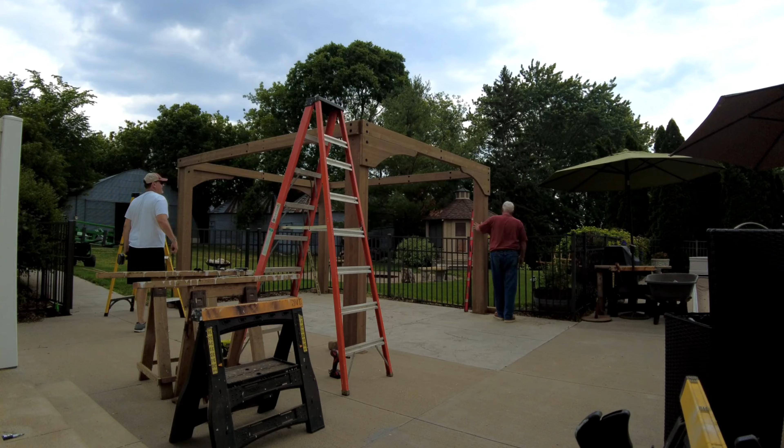Alright, this is Dad Random. On vacation, and when I go on vacation, I usually build something. So this is the Grandpa John bar shed, working on a little gazebo project for him. Building it now. This is a pre-build, so it should be kind of fun.

It's a little bit tough. We've had a little bit of a challenge putting it together. A lot of parts to this one. Used to making things from parts that I create, but this one is basically made of parts created by somebody else and directions written by somebody else. So it's been real good, it's been a real challenge, but it's pretty hefty. It's not bad. It's a Costco project. Got a lot of bolts, a lot of real heavy duty reinforcement, so it's going to be really nice.

This one's about, it's a 12 by 14, so... yeah, 10 by 14. I think it says 12 for the roof, but at the base, at the foot, it's 10. So, but yeah, it's pretty cool.

So yeah, day one, got a little bit of a time lapse. Couldn't do another time lapse because it was hot, and then I was trying to keep a pace, and things happen. So we got a little bit in there. But I wanted to get like the barn raising time lapse. But so far so good.

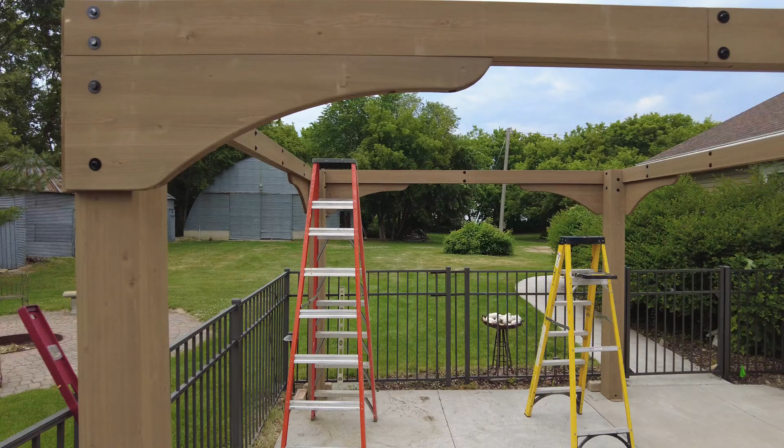All right, Dad Random. So there's a corner construction, base construction. You can see the bottom plate, this will be bolted. But yeah, and just remember, mine's bigger, at least 5 feet.

Okay, on vacation, working on bar shed number 2, Grandpa John's bar shed. I guess you call it a gazebo too, but we're gonna drink beer in it. Bye.

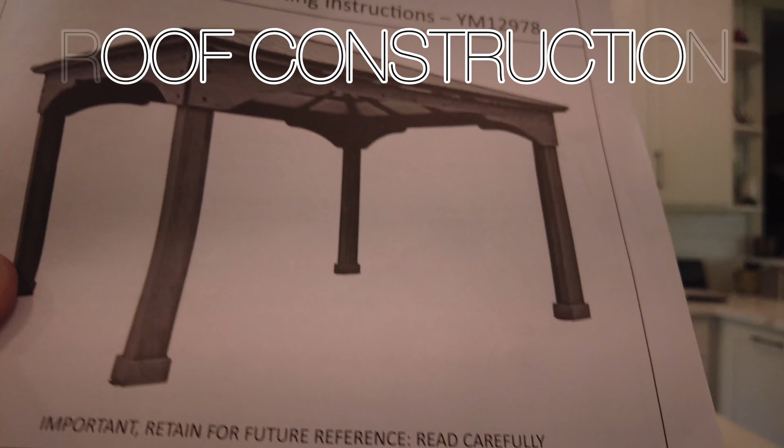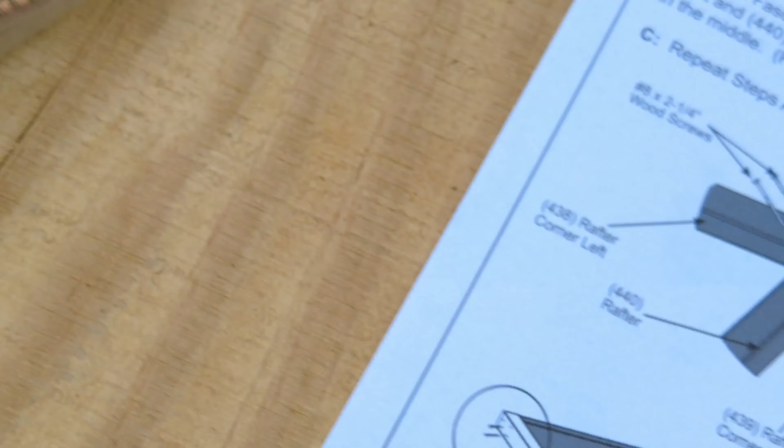Alright, today we're working on these roof panels right here, roof rafter assembly. A couple of notes: one is making sure you line up - these are compound miters. And making sure you keep your screws marked. So we've got our screws labeled out and laid out. And make sure you connect the 2 fascia parts so you get the correct length.

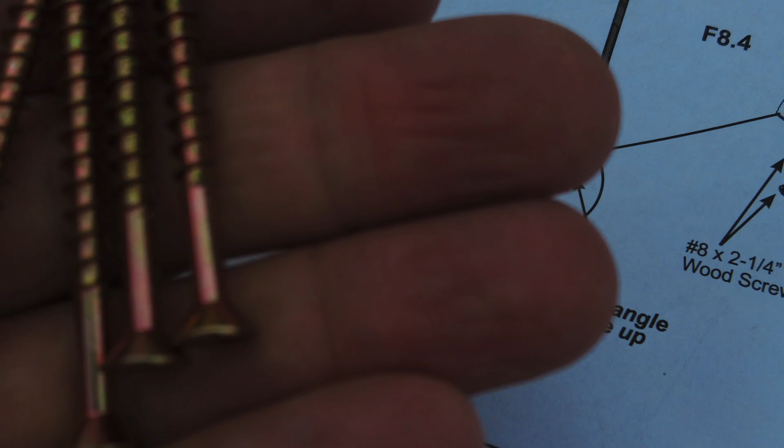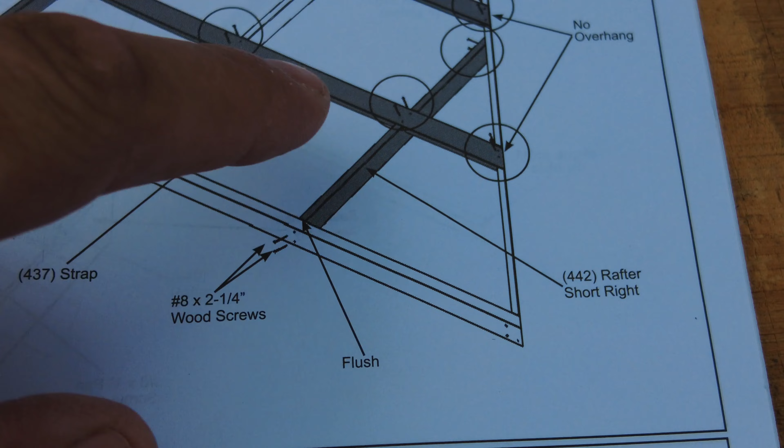But there are 2 sets of screws in this construction. The ones that connect the corners together, which are basically 2 1/4 inch wood screws, and then you have 1.5 inch screws right there. You'll see that connect the flat parts that the metal will connect to when you start putting the tin on, or the roofing material. So there it is right there.

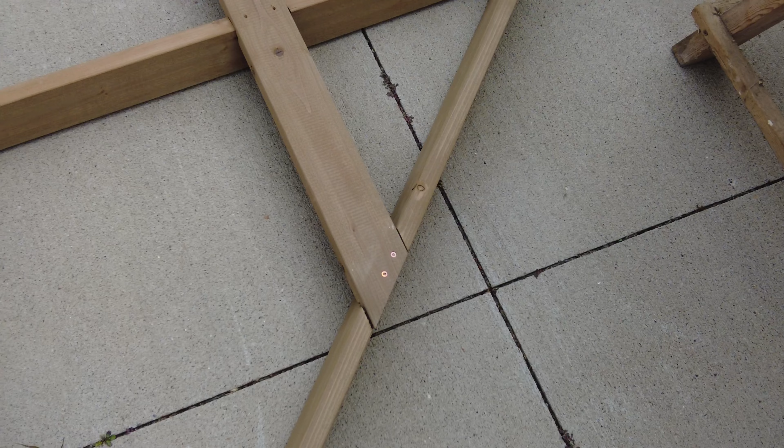And you've got the structural elements, and then you've got the flat parts. So, alright, good luck with that. We've got 4 of these to put together today - 4 on the corners, and then we'll look at the construction part, how everything kind of ties together.

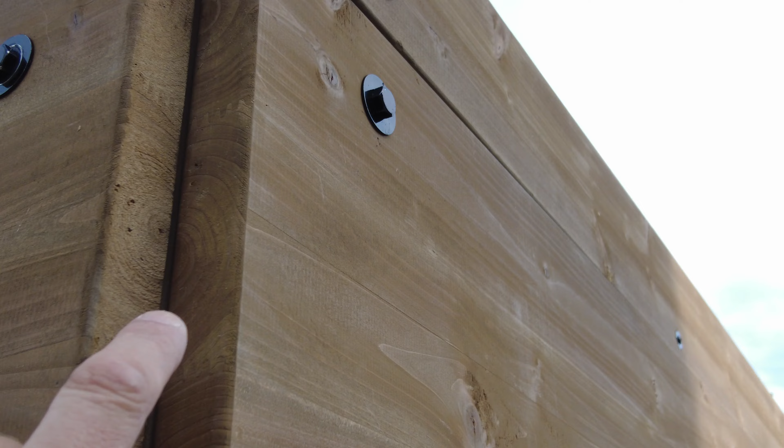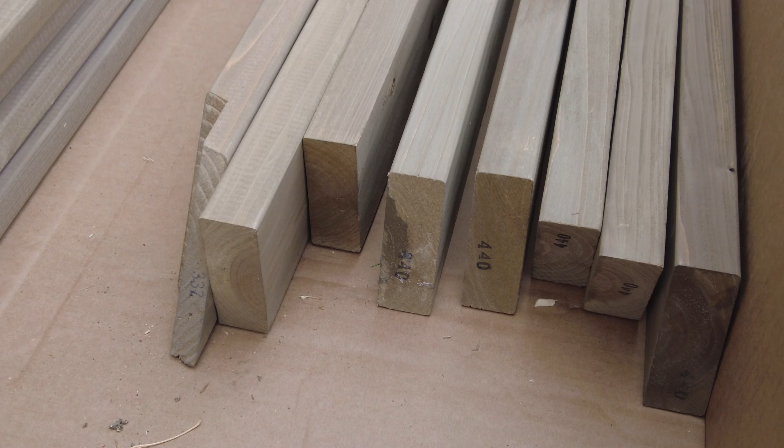Here's the way we've got our tools assorted and our boxes laid out. Some of the construction details - they're not perfect, but they should work fine. And the footprint. More box layout. Start to organize numbers, you can see each of them are numbered on the ends. Number them together so you don't have to look so far. You're going to be looking a lot.

These are vertical, these are also vertical pieces. The horizontal pieces tend to be thinner, skinnier. Good luck.

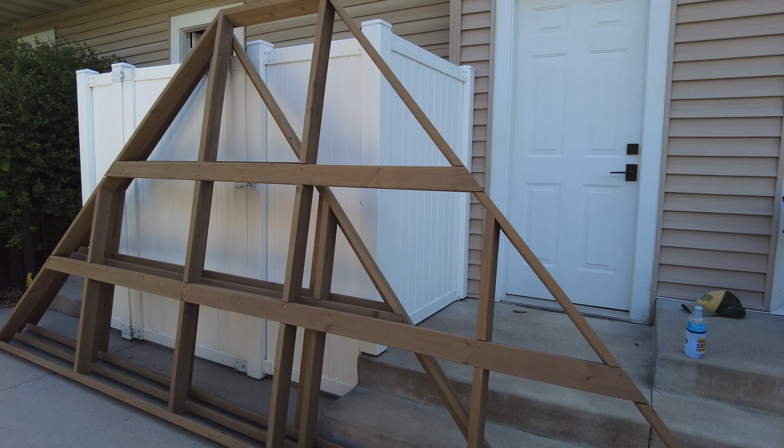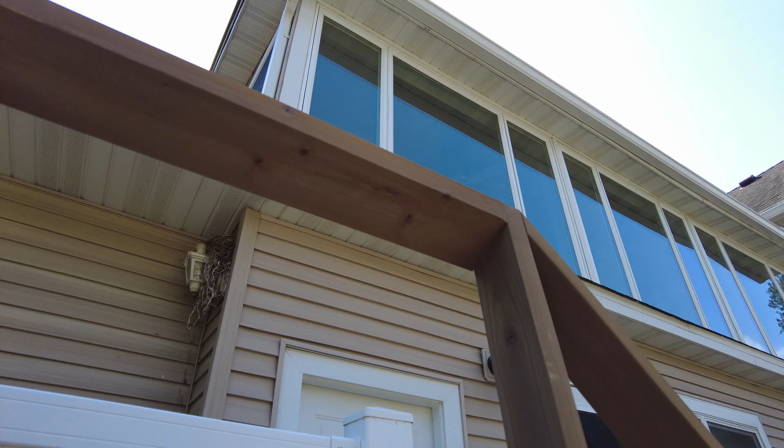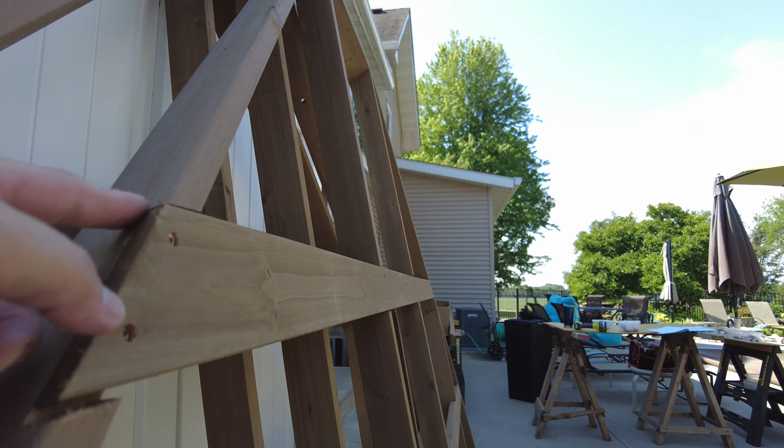You've got a square segment on the top, but it pretty much follows the rest of the rules. Just pay close attention to the numbers and the angles, okay, because you've got basically compound angles coming together. You've got basically 3 different planes, 1, 2, and 3. So right there, that is piece 1. I'm gonna repeat this piece.

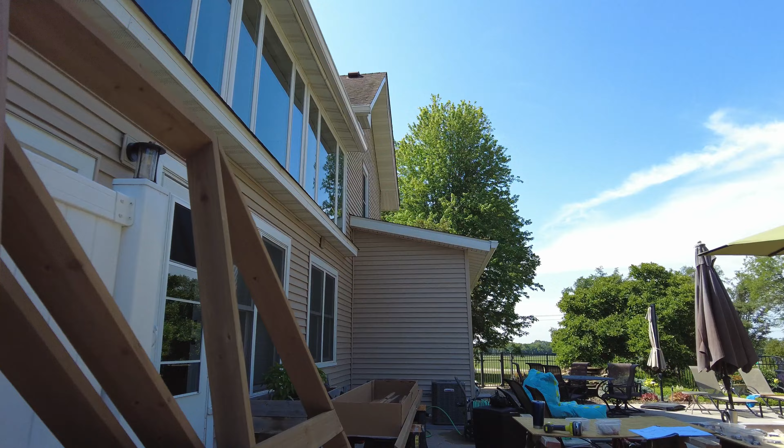There's actually 3 different types of screws in here. These are larger, 2.5 inches - almost all of the other ones going this way are 2.5. These are 2.25, and the rest are 1.25 inch - the ones that are pulling the segments together.

So far so good on the rafter build.

I should have this last one done. My hamstrings are good and stretched out.

It's really important that you find a big flat area. This area here that I'm basically working on - let me just flip it over - is probably 15 by 10. So about 15 by 10.

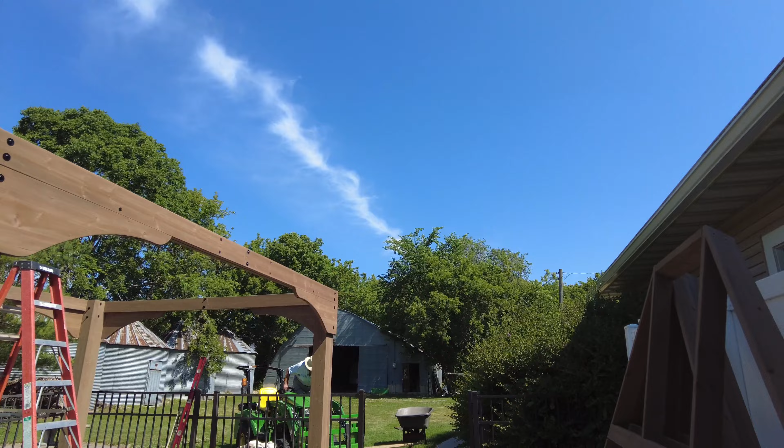And it helps to have a really level area. You need a real big flat area, otherwise everything is going to be tougher to piece together. But there it is - there's a step, probably a 3rd set. I'm going to finish the 4th set, and we'll start piecing together the roof pieces in sequence.

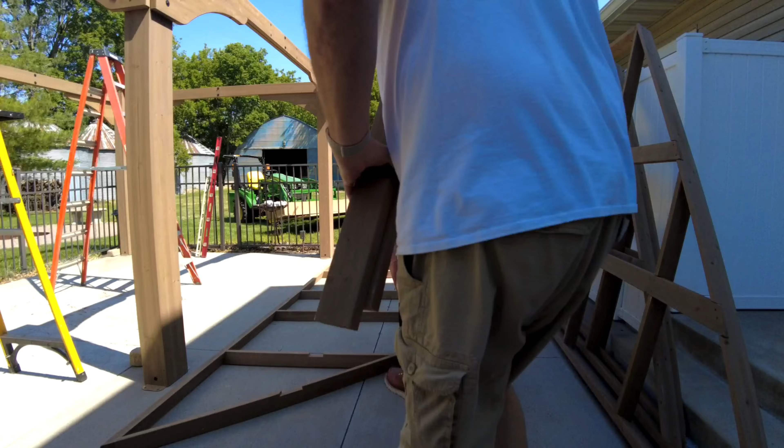All right, Dad Random back. Here are 2 of our completed roof panels.

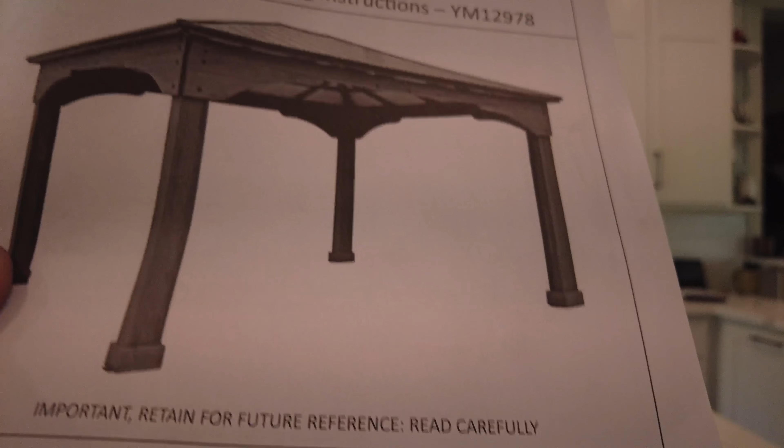So one of the things I suggest is, and pretty much all the material you're going to find, is assembling these - now these edges are kind of tricky, and you have to make sure that you put in the weather stripping.

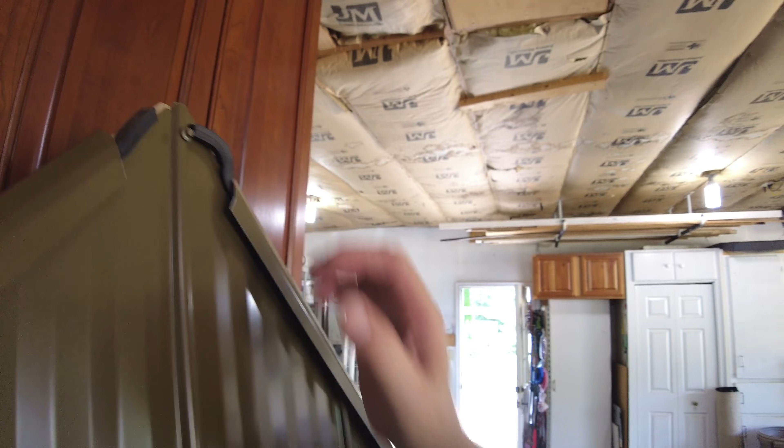Crossing our fingers that these are okay. You can see the unfinished large side panels and the different - there's a lot of pieces. There's a whole lot of flashing, and every single piece of metal has a coating of that plastic, so you have to separate it. You can see right there.

So far so good. We're crossing our fingers that all the panels will be completed, and we'll put them up tomorrow, probably tomorrow morning, assuming we don't have issues.

I think we've been at it today probably since about 8:30. So we've got quite a few hours in this project. There's two of us, and we're just kind of taking our time.

The directions are pretty good, but they're not clear. I suggest to anybody working on this project to check all the videos. There's a lot of good videos, including this one. There's a lot of little steps that you need to basically adhere to.

One is as you fit these steel panels on right here, you don't want to fit them all the way to the edge - you want to bring them back just a little bit. It's okay to overhang at the bottom, but the area where these two pieces meet, you want to leave a gap. That gap is good because it allows for the four sections to squeeze together.

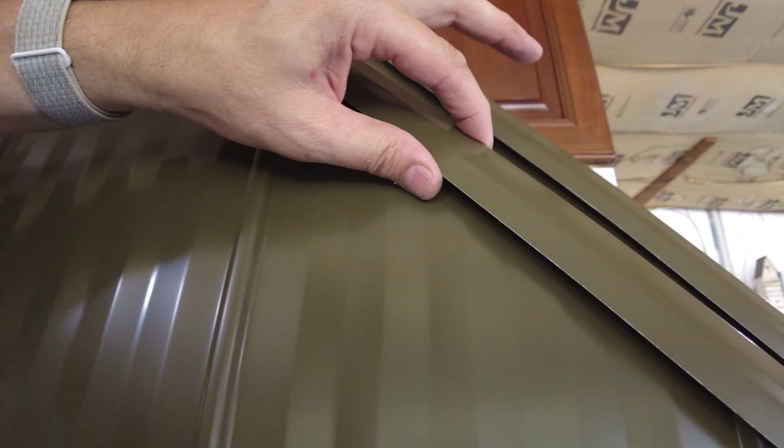And you see these edges right here - there's a piece that's gonna slide just to connect the two sections together. So these right here, you see how they're slid together - these will slide along both edges and create a ridge lock. So anyway, we'll get to that point and then show you how that locks together.

But so far so good. Weather's been cooperating, so that's one of the things you want - and of course any labor-saving device is always nice.

So all right, I think we got every tool out that's possible. But you can see this big space - we're basically in a 3-car garage, and we're utilizing the whole middle of 2 of the bays to set these big sections. And these sections over here are even bigger.

They are 14 feet long by 10 feet wide, something like that. All right, Dad Random.

Take your time. Look at the fine details, especially where the trim comes together. Measure twice, cut once, as a very famous builder would say - but I would say read twice, and then put it together once.

We've only had to assemble these two parts twice - we've had to pull the screws out, readjust the metal sheets, and then screw them back in. Both of them we had to do. So it's just, but I think we're good - I think the way we've got them now.

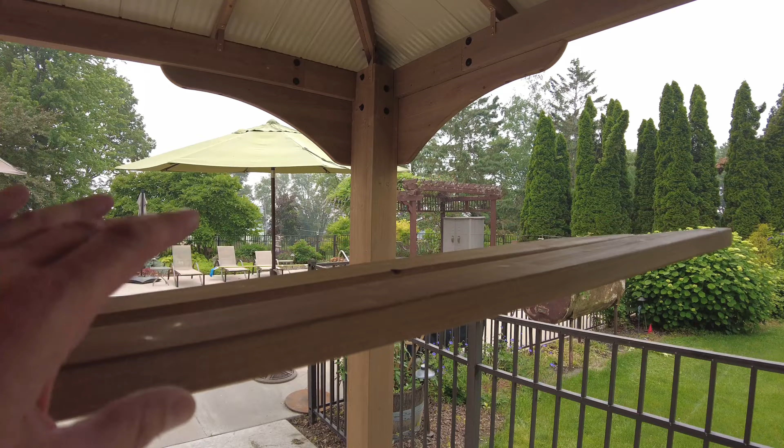There's only two more boards left. These are basically span ties, they just span the roof, some strengtheners to give it some extra support. We'll put those up. We haven't tied down the main post to the ground yet, to the concrete. Not yet. We're here, but the roof has got plenty of span ties.

And then if you look up this way, see if I can go find it. So we got the roof trimmed out. So let me see if we can get it... it's not behaving here. Let's do this. All right, so there are the roof angles right there. Corner finish.

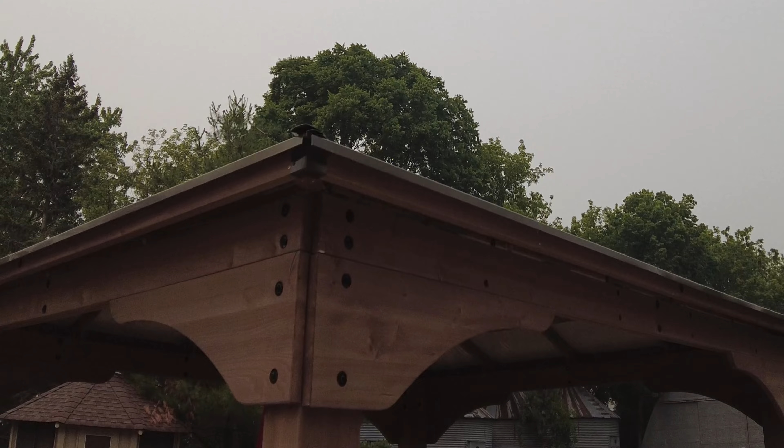You got a couple little call those personality traits. Everybody puts their own personality in a project. Not too happy with how those trim out, but it's still pretty good. That's just the way they are, that's just the way they trim out.

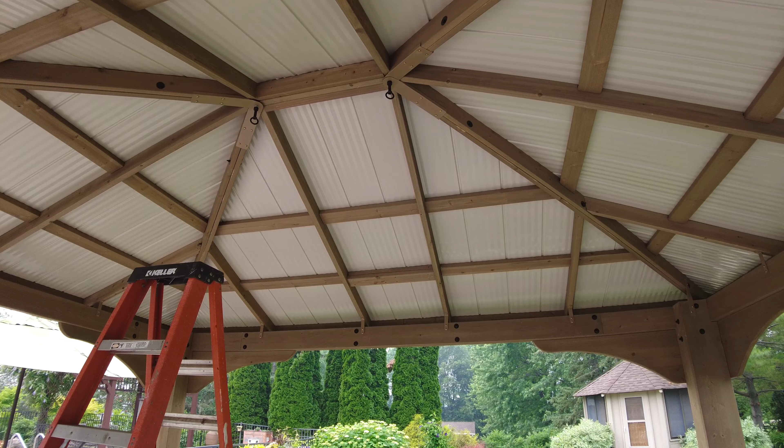And then up at the very top there, you can see those little hooks, so you can put something really light from them. There's a bolt that goes all the way into the roof cap. I wouldn't hang anything more than a light fixture up there. Definitely no heavy plants, those are plastic. Even if they were metal, they would probably bend the top. But if you did want to put something in, you'd probably want to bolt into that header up there.

All right, so there it is, Dad Random. 3 days, 3 days, and we've got shade. Very nice space. So, let's get that right there. So there he is right there. He's very proud of his new gazebo.

All right, I would say if you had 3 sets of hands, it would help. 2 sets of very, very capable hands, maybe 3 sets. You need a helper, but you can never get too much help on a project like this. All right, for Dad Random, I think we're done for today.

Day 4. We've got a couple little extra doodads to do, but it's pretty much done. We might move it a little bit, don't know yet, we'll see. We'll see next week. Taking some time off later.

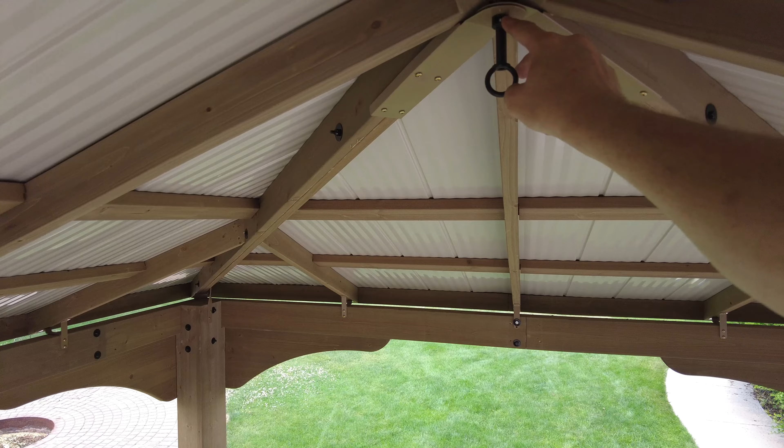Just snug these up, and there's a bolt in there, and these are just plastic. I don't know why they didn't make these out of metal, but they just snug up like that. There it is, just like that. That one, and now they're lined up all the way.

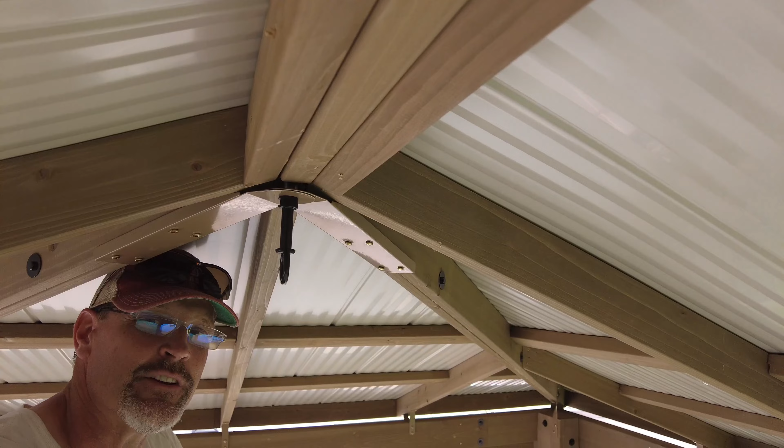But you can hang your freaking chandelier. If you want to, you can hang your chandelier from up here, but make sure you beef that up. Put a bolt through that or something, maybe stick a bolt through there like that. Make sure you put all your ties on.

So if you look all the way to that corner right there, you'll notice that there's some ties, a couple of metal ties there. Those are tie straps, so they strap down the corner right there on all four corners.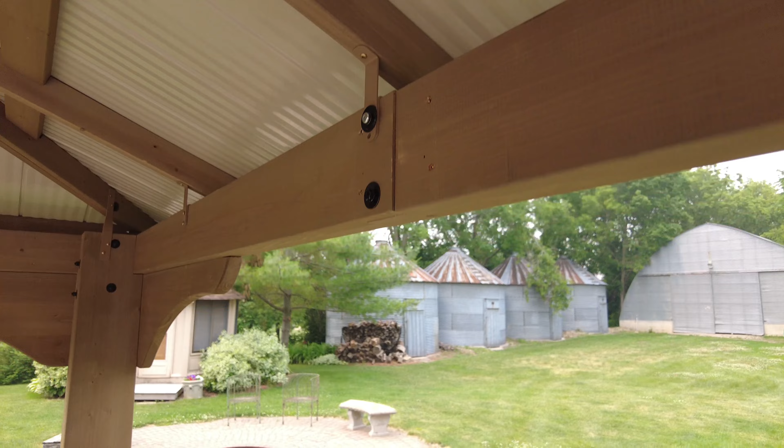Had to do a little modification right there because we screwed that up. What happens is that this is the mistake. See this modification right here? This is where this bolt lined up, and it was right on this rafter tie. So I took it off, re-drilled this, and then found an aftermarket bolt and went right into the T-mount. There's a T-mount that pulls that in, and then I threw 4 extra screws in there.

So that's the modifications, other than that, that's about it. That's about, you know, you can't go into a project like that and think that everything is going to go perfect. You have to have a plan B for everything.

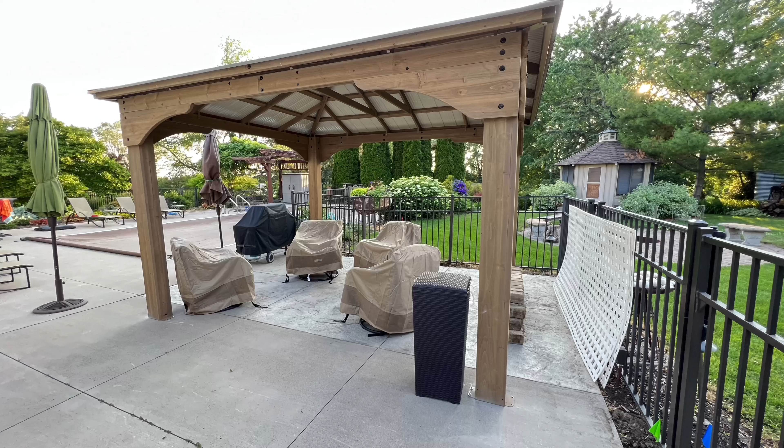So, all right, Dad Random. The 14 by 12 foot Yardistry Costco Gazebo. I think that's all, I think that's everything right there. 12 by 14 Yardistry Costco Gazebo by Dad Random and Grandpa Random.

Successful project. All right, have a good one. Build smart, measure twice, cut once, says a very important person, someone very, very, very much more experienced than me. Later, bye. And be prepared for Plan B.